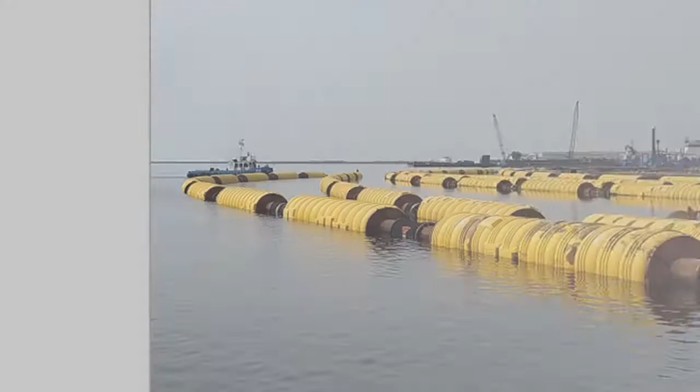KIASMA is an Italian company specialized in the dredging, marine and oil sectors with more than 40 years of experience and an iconic portfolio of projects in the world. KIASMA is the leader in choosing dredging pipeline solutions. Strategic partnerships, international culture and local presence around the world give shape to its global footprint.

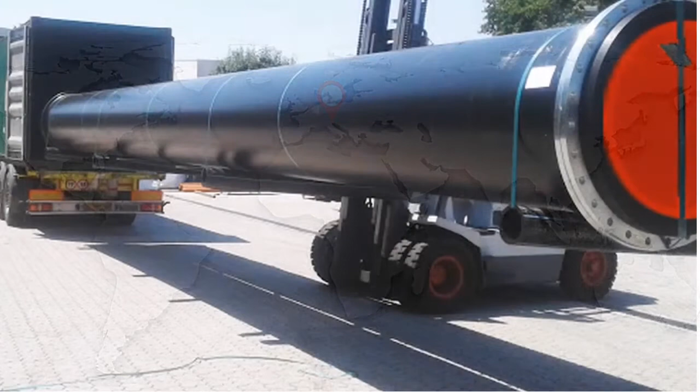We are your partner. Private companies, port authorities, ministries and governments in 76 countries in the world trust us for the purchasing of discharge lines for the transport of dug materials. KIASMA Group is redefining the investment perspectives to obtain investment benefits and good results until the purchase is qualified not as a commodity but as an asset.

We constantly strive to become a global EPC, providing solutions and managing discharge lines in the dredging sector. The group is also committed to spreading technology and engineering, setting itself as an example for everyone in the sector.

We are committed to a sustainable environment by providing solutions and technologies environmentally friendly for materials recycling and for product safety. Our employees are our most valuable resource, constantly giving them training.

We are committed to provide quality services and products in all of our business activities, ethics without compromise, and environmental awareness. We are committed to support the environment in a sector where goods manufacturers must meet global demand for recycling and disposal. KIASMA's proven leadership is able to lead with integrity, competence and creativity. This allows us to improve continuously, our responsibility being an example for all the others.

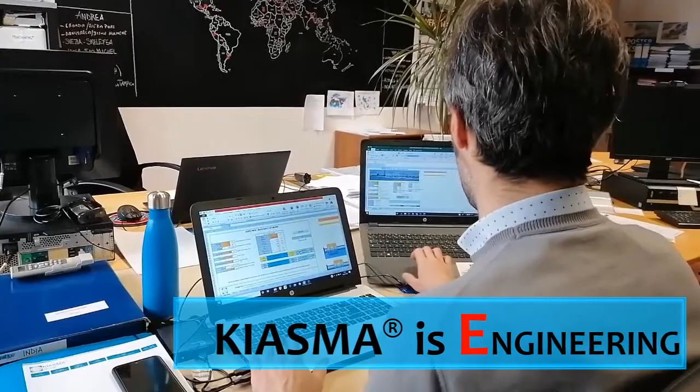KIASMA is engineering. Highly qualified engineers are working on thousands of projects in worldwide locations. They are fully qualified to optimize all project aspects until the definition of the best dredging solutions. We hold seminars on raw materials, hydraulic calculation, hydraulic and mechanical calculation with software CFD analysis, FEM analysis, around the world.

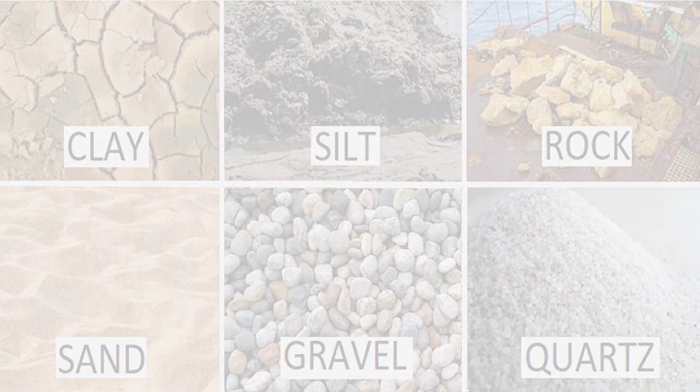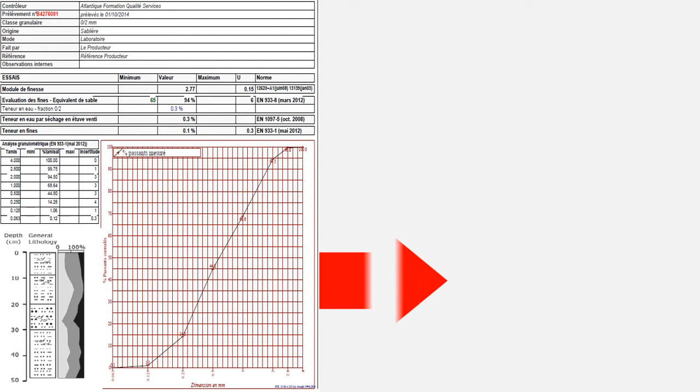Starting from the sediment analysis present in the dredging site, KIASMA identifies the type of pipes that offer an advantage in terms of costs and benefits. The project passes through the profitability index, cost estimation models, for the detection of the MOL, gross operating margin, giving our clients the opportunity to evaluate the EBITDA, earnings before interest, taxes, depreciation and amortization.

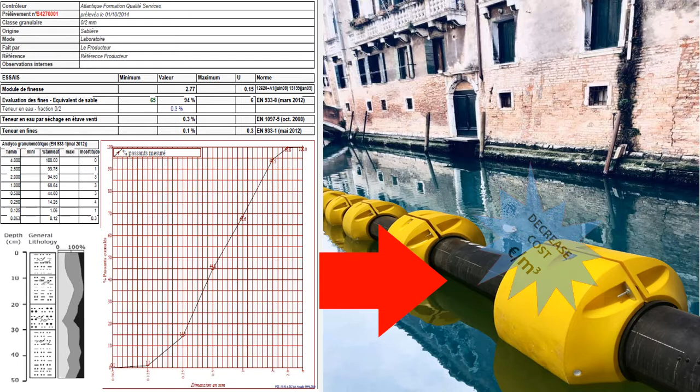KIASMA's ultimate target is to decrease the cost per cubic meter of the discharge line. It is constantly striving to introduce the latest technologies in the dredging discharge line by scouting new technologies.

The chemical, physical properties and the mechanical characteristics of the raw material used for the production of the materials are: resistance to abrasion, resilience, resistance to laceration.

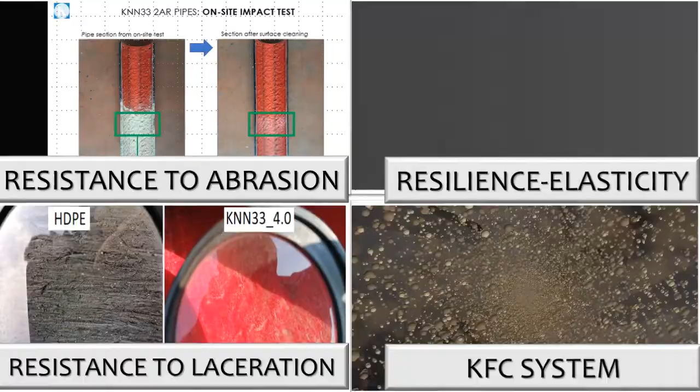Flow motion: the KFC system creates a rotational motion of the inert inside the pipe, with a Reynolds number of 200,000. There is no need to rotate the pipes. Abrasion decreases by 20%. The KNN33 4.0 type, thickness of the anti-abrasive layer, and junction type are studied by KIASMA engineers for each project. All the materials were tested together with the University of Padua and the results are confirmed by a public body.

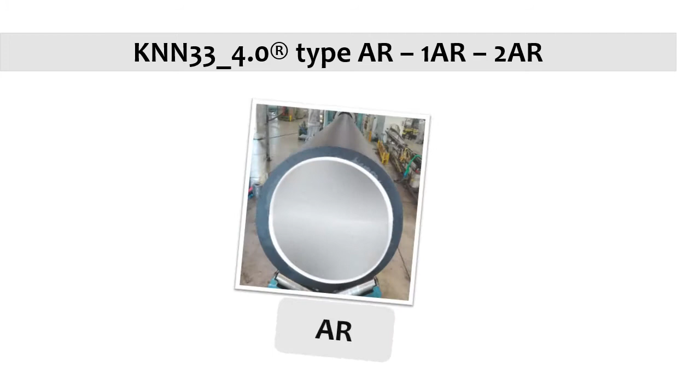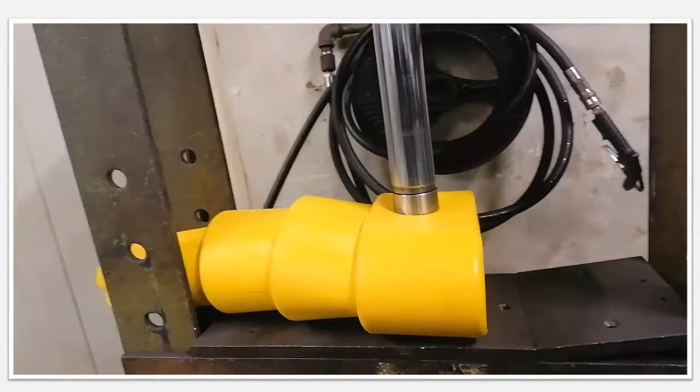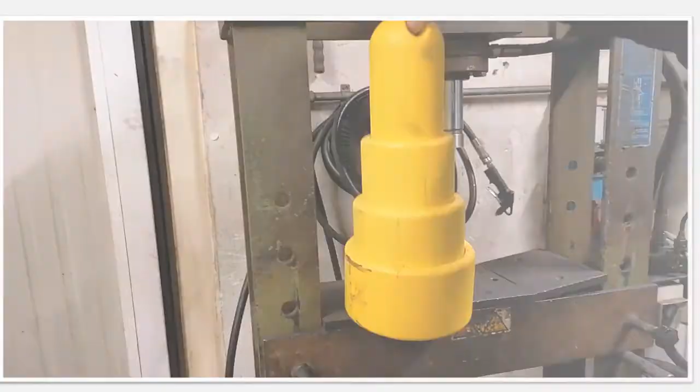With the aim of optimizing the profitability of dredging companies, KIASMA has developed 3 types of compounds that can be used according to the type of inert dredged. The same raw material is used for the floats. The principle of elasticity is comparable to that of a telescopic fender protection device, used for the mooring of small boats or for the approach of pontoons to the discharge lines. KNN33 4.0 elasticity allows the float to absorb shocks and return to its original shape.

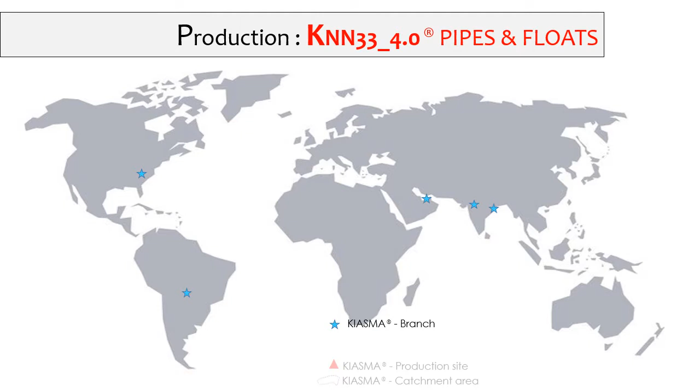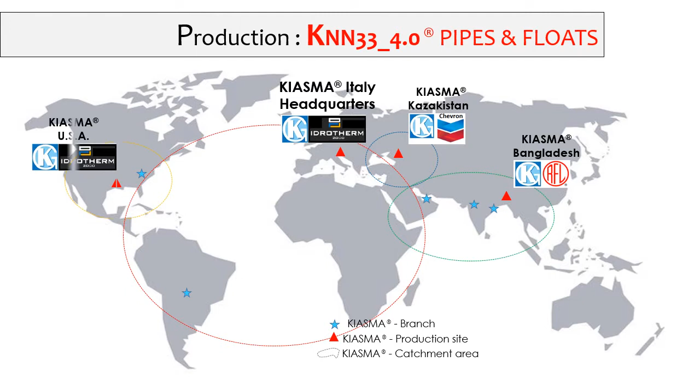KIASMA is procurement. The global management of KIASMA Group is supported by regional offices strategically located in the Middle East, Asia, Latin America and USA. In addition to the production units located in Italy, KIASMA Group has outsourced production in Southeast Asia, India, North Asia and USA, to international production companies. Through this complex network, KIASMA effectively manages hundreds of projects a year, cutting costs for duties and transport.

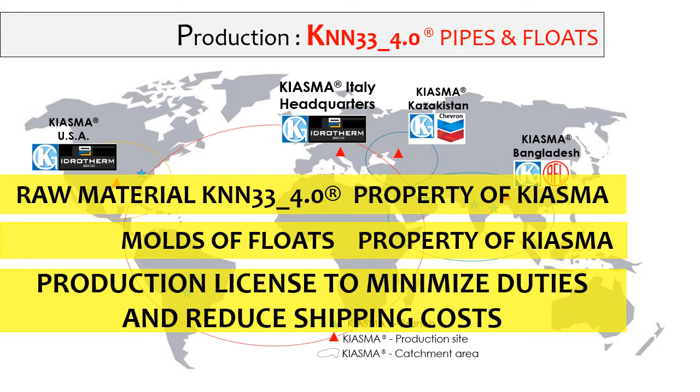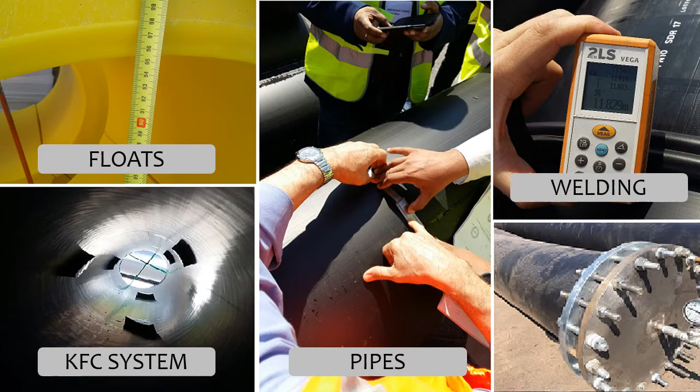Pipes and floats undergo strict tests done by KIASMA Quality Department, in line with the quality management and quality assurance standards imposed by international standards regulations.

KIASMA's operation division is developed into 3 different divisions: training pipes, welding pipes and floats assembly. Attention to the customer is for KIASMA the cornerstone of the correct application of the initial design.

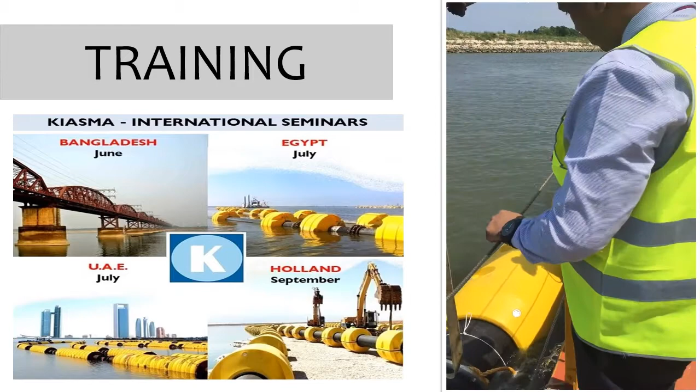The post-sale service is essential for us. Training technicians constantly bring knowledge to operators in the sector on the use of the technology used in the dredging sector. The KIASMA teams are made up of fully self-sufficient specialized technicians, able to work in compliance with international standards, with their own and local means, in compliance with budgets and benchmarking.

The reliability recognized by many public and private companies in the sector, the strategic partnerships of KIASMA, the international culture and the local presence in offices all over the world, give shape to a global footprint.

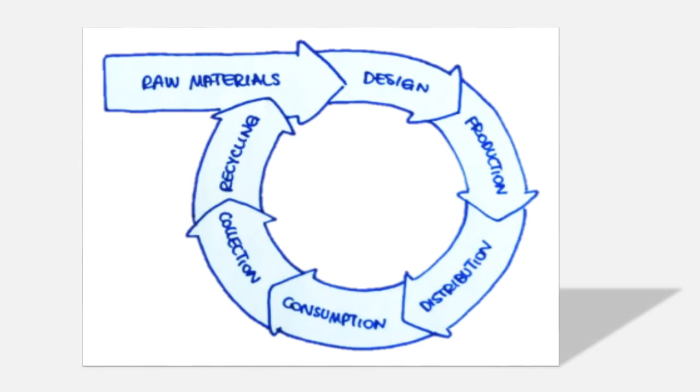The European Green Deal establishes an action plan aimed at promoting an efficient use of resources, moving towards a model of circular economy, restoring biodiversity and reducing pollution. KIASMA seeks to transform linear production systems into circular systems, incentivizing the recycling of materials. In the logic of circular economy, KIASMA materials are designed so as to predict from the beginning their recycling.

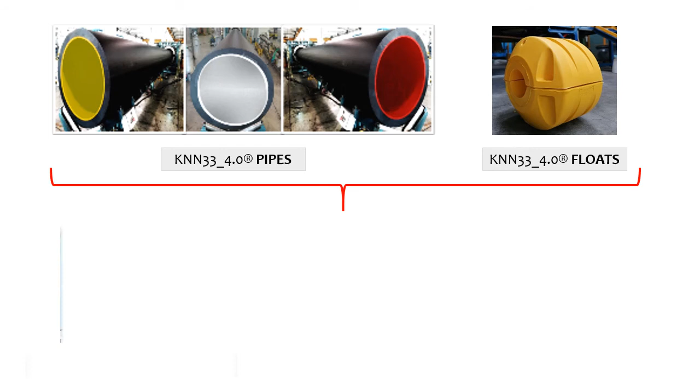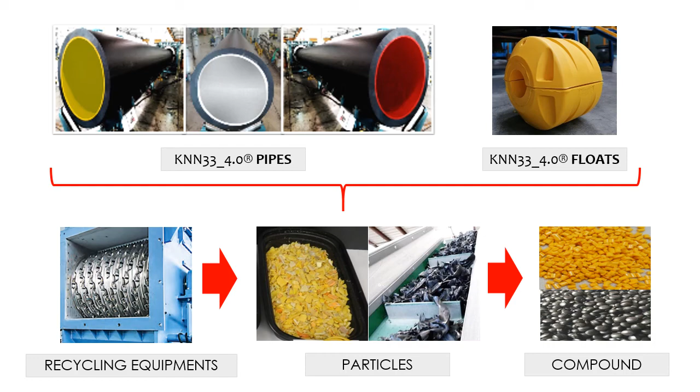KNN33 4.0 can be successfully recycled. The recycling process consists of fine shredding and the formation of new granules that can be used in the molding of new products. Through this intricate network, KIASMA effectively manages hundreds of projects a year.

There is no future without technological progress.